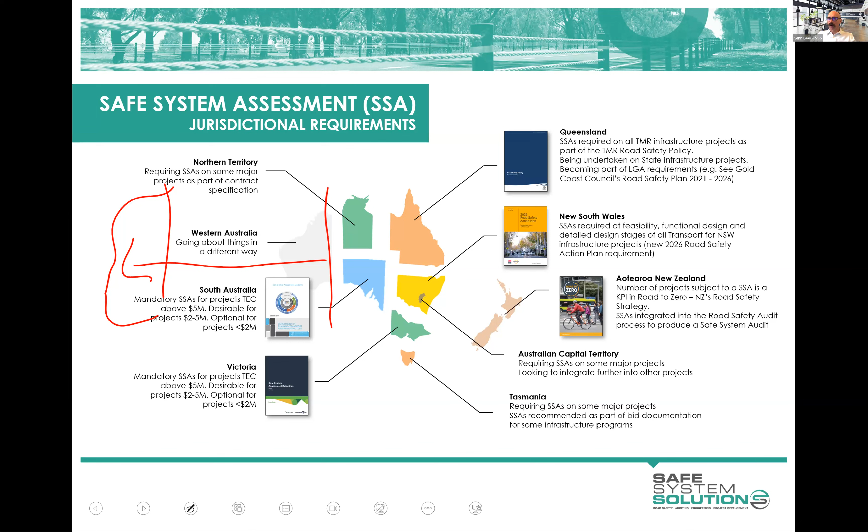And the way it was done was using a crash prediction model. A crash prediction model, as the name says, looks at a road or a new investment using a very data-driven approach, trying to model and project how many deaths and serious injuries you would expect. So plugging into it things like projected traffic volume increases, pedestrian increases, cyclist increases, and also generally around 70 infrastructure variables to spit out some data around expectation on crashes.

Some models take into account past crashes, some don't - they just use data from around the world: we know this configuration would generally produce this number of deaths and serious injuries.

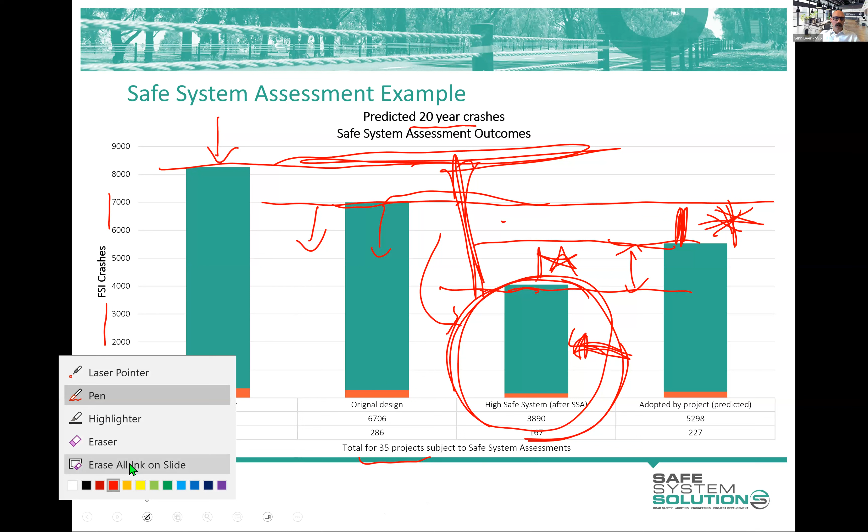So Joseph's popped a question in there about new vehicle technology, and whether that was also assisting in reducing crashes.

Yeah, so the prediction model does take into account vehicle technology and the improvements in vehicle technology over the next 20 years. The way they do that is pretty fascinating methodology for crash prediction. For all of the crashes they're expecting, I might as well spend a couple of minutes explaining how they do that.

So what you do is look at an existing road, and it's got a number of crashes on it at the moment. In the past 5 years, there's been a number of crashes. And what they do is take these crashes, and they actually do this for the whole state or region, not just the length of road.

But they take the crash and ask, what was the age of the vehicle in that crash? And they say, well, the vehicle was a 2013 Toyota Camry. Okay, so then in 20 years' time, it'll be a 2033 Toyota Camry. And what do we expect that vehicle will have in terms of features? So they're able to do that.

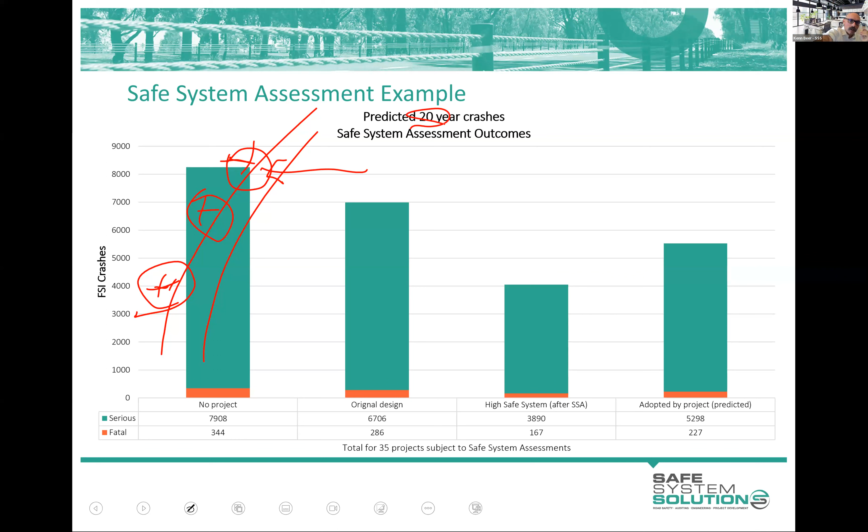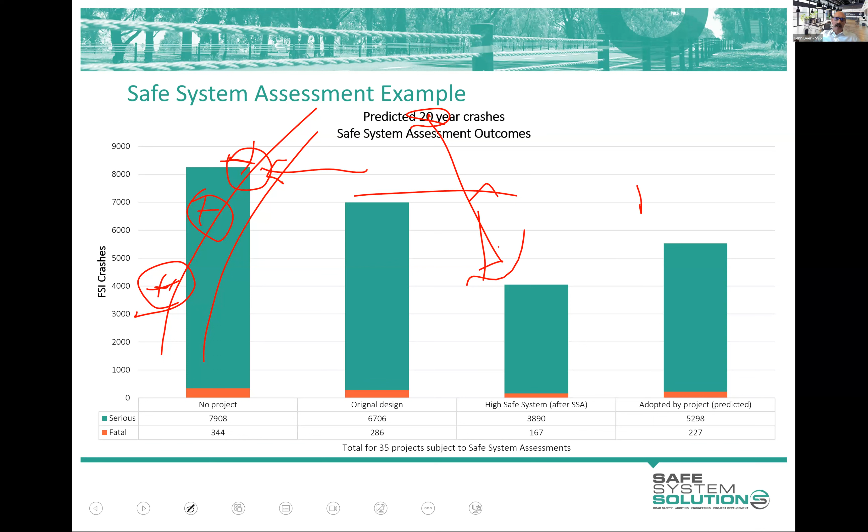Now, it gets a bit more complicated because your crashes over 20 years occur across those 20 years, not all at once, so you have to split it up that way. But it's about acknowledging that the cars involved in crashes today are not all brand new cars. In fact, a lot of them are old cars, and we expect that to continue into the future. That's how they factor it in. So a lot of crashes in this scenario, they say, will solve themselves with the vehicles. But I won't get into that in more detail, just to say there was some factoring of that into this.

We do have a question. Ken, I'm not sure if you're ready for this. Am I right to read it? Yeah, I see it's a big one. Big one from Michael, maybe specific to the assignment.

Okay, thanks, Michael. So the quick answer is yes, that could be possible. It could be possible within your assessment that the existing conditions has a score of 150, and the design has a score of 152. It's pretty much exactly the same. You're not really doing anything. You're changing things, and there may be other transport objectives being addressed by it, but from a safe system alignment perspective, you've pretty much done nothing.

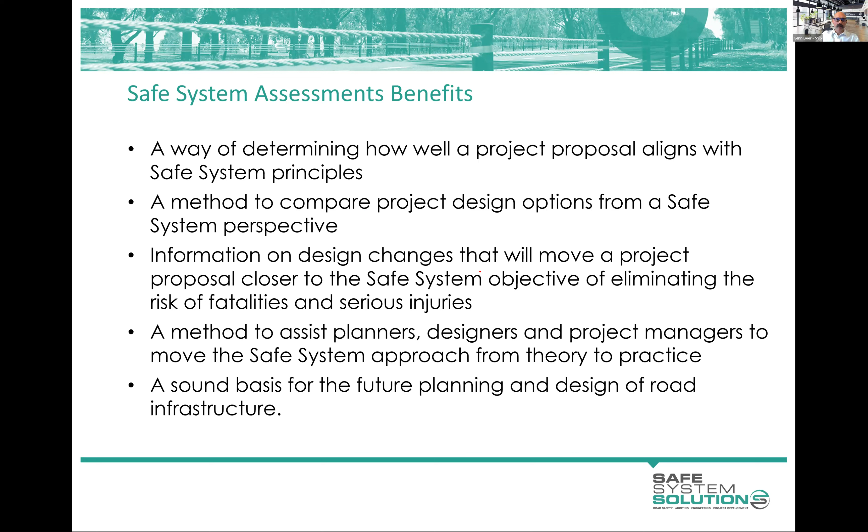Safe system assessments are best done at the early stages of a project, because there's willingness to change, to adopt ideas. There's often multiple options on the table, and that's a great time to do it.

Once you're into detailed design, or looking at a detailed design, people are very reluctant to make any meaningful changes to that project. They're happy to tweak around the edges - a warning sign here, a slight flare of a barrier there - but fundamental changes like raising an intersection, changing the form of intersection, or altering the cross section, those just aren't going to happen once you're in detailed design. That's why we want to get in early with the safe system assessment.

Road safety audits in early stages can make some of these suggestions on more fundamental changes, but they tend to align better and work better in detailed design, where they're really looking into the nitty-gritty details.

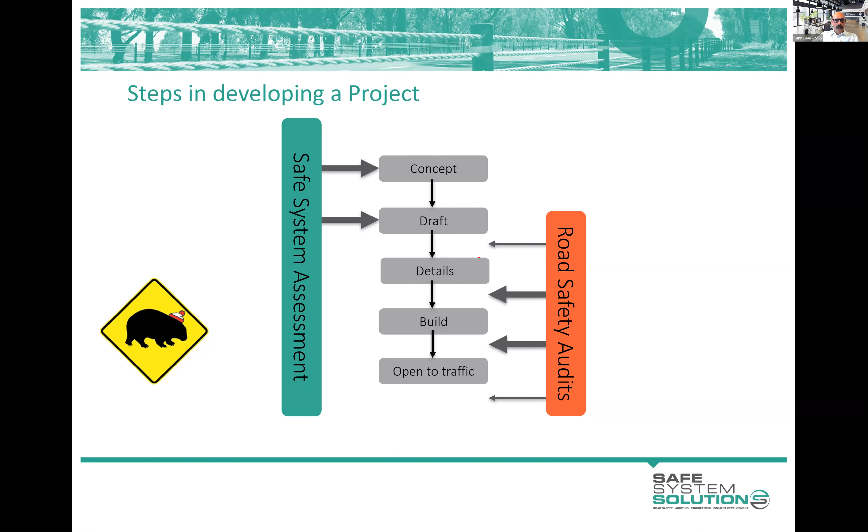So likelihood of crashes is addressed really well in both audits and safe system assessments. Severity, I think, is better done in safe system assessments - you're so much more overtly forced to really analyze the severity of crashes. In theory an audit should do it too, because you risk-assess with likelihood and severity, but I still continue to see a lot of road safety audits out there that don't.

The classic example is a big signalized intersection. The audit comes through talking about sight lines to the signals, phasing, lighting, line marking, pedestrian desire lines - really great stuff, right? But it completely ignores the severity when somebody runs the red light. The audit is 100% focused on stopping people running red lights, and that's great, we want all of that. But we need to put ourselves in that position to say: even if we get all that right, if you're running a set of signals at 80 kilometers an hour, people are going to crash. Doesn't matter if you've got mast arms and LEDs and great sight lines and advanced warning - they're still going to run it.

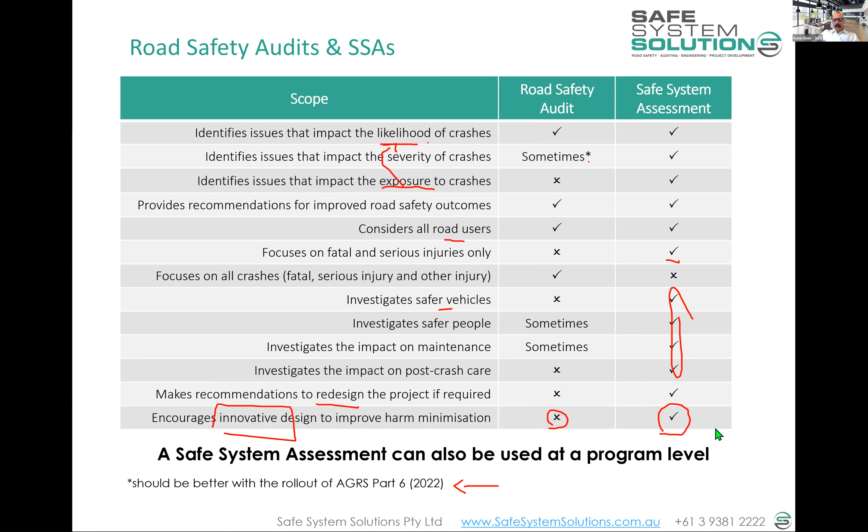Okay, so the process of safe system assessing in general practice is very similar to the process for a road safety audit. I haven't talked to you about full and rapid safe system assessments yet - that's the next few slides - but they are fairly close to each other anyway. One's just a bit quicker to do, rapid being part of the name. Not a huge amount different. There are just a few little corners that are cut on a rapid.

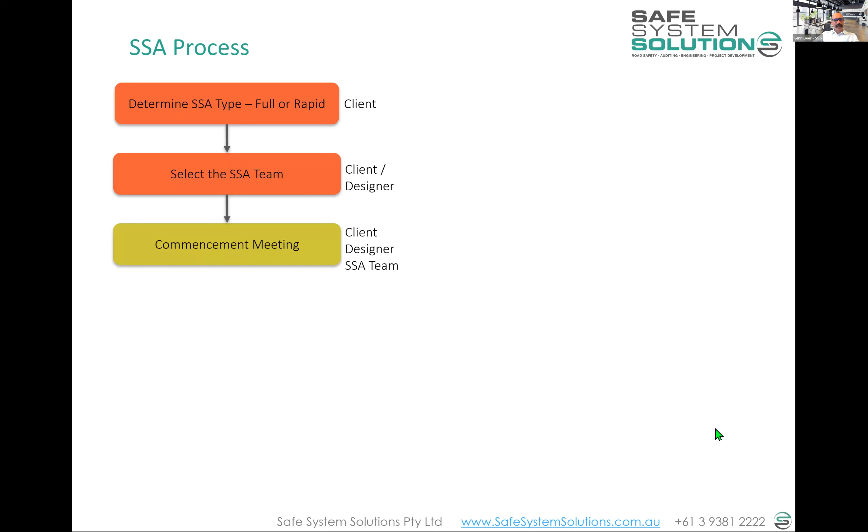So somebody's deciding A, to do a safe system assessment, and B, whether it's a full or a rapid. And then there's the selection of a safe system assessment team and some sort of commencement meeting, and within that, exchanging of information, understanding the scope of the project, getting everybody clear and on the same page - what's happening, what's being proposed, what's the land use, what's the area, what are you committing to here?

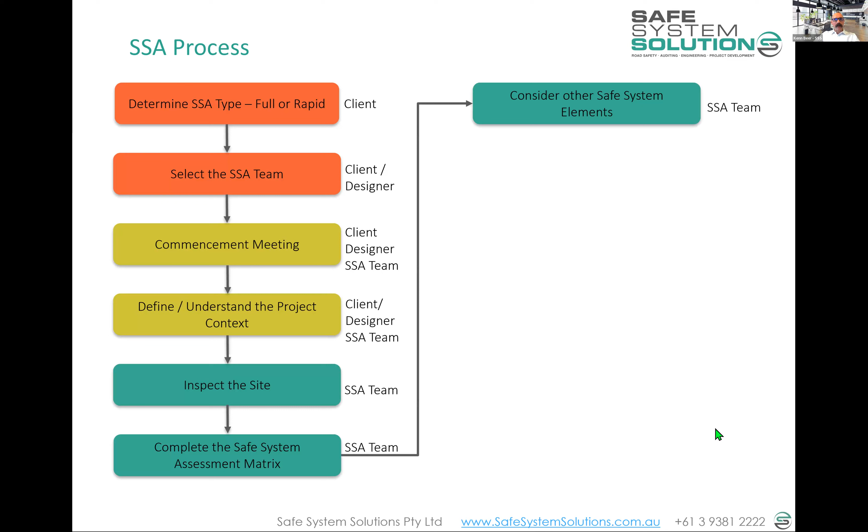Then the assessment team gets out and looks at the site, fills out the existing conditions matrix, and then all of the matrices that come from there, depending on how many design options they're given. Considers those wider elements of the safe system - those qualitative questions I talked to you about yesterday, at the end of last session, about general considerations, some ideas on treatments or changes or redesign alterations that would improve alignment with safe system principles.

It's all reported up in a fairly standard manner, and you've been working with a standard reporting format, which is going to help you - you just follow that and use that again. And then it's handed over to the designer or the project manager, and they look through and decide what they can and can't do and what changes they're going to make.

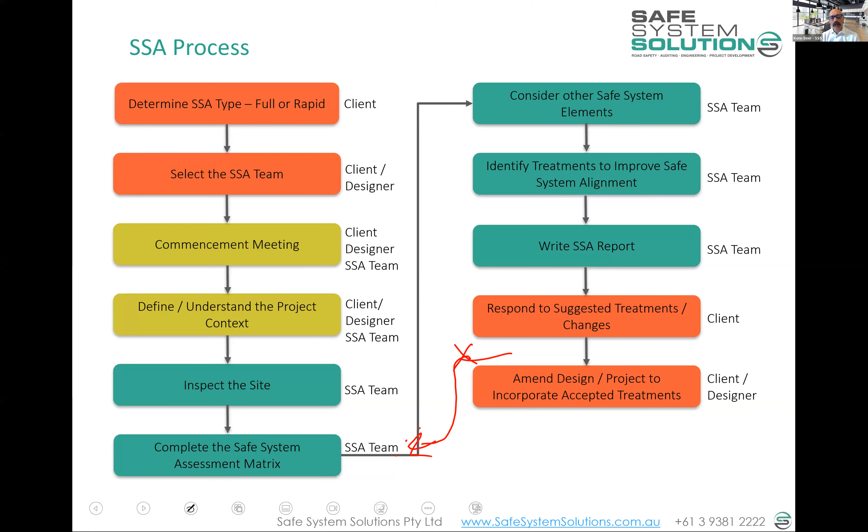And then the design is amended, and those are incorporated into the project. Now, what will often happen, or sometimes happens, is between these stages they'll ask you to rescore. So they've said, well, okay, thanks for all your ideas, we're going to do these 6 out of 10 that you've come up with. Can you tell us what that will influence in terms of those scores and the matrix? So then you would rescore that as though it's a new option, and you'd be able to provide that change.

I kind of like that for a number of reasons. But one particular one is that you can end with this really nice graph, which says the total original do-nothing scenario, existing conditions, had a score there. And then the design we put forward to get safe system assessed was there. And then we took on these recommendations and it brought it down to there. And that is great proof to anybody that you've been pushing hard to get the best you possibly can in alignment with safe system principles. It's a good little story.

So, Loretta, I saw that - sorry, just a little comment there from Joseph, just to confirm the safe system assessor should be independent for the project, like in RSAs.

Yeah, so there's never been as strong a demand for independence for safe system assessing as there has been for road safety audits, where everybody on the team must be independent, like for a road safety audit. That's just, you have to do that, right?

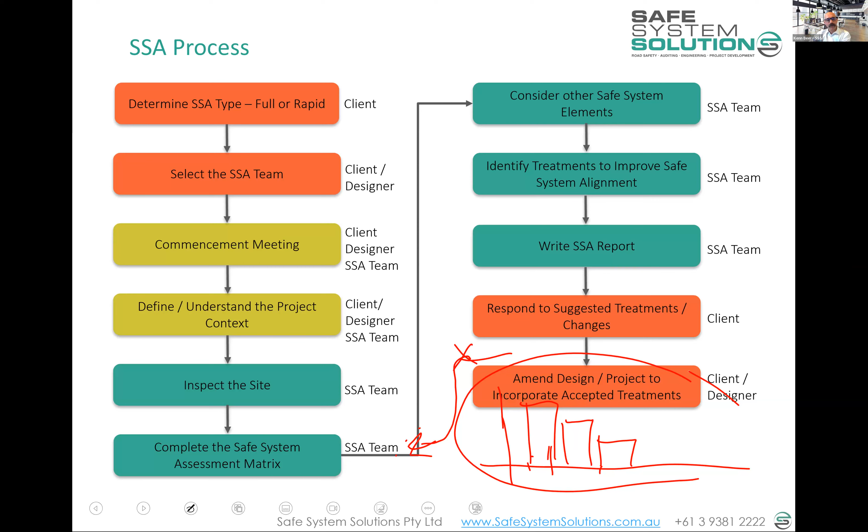So who is putting up registers? Which jurisdictions are doing registers? So many of you will know there's registers of road safety auditors around the country, and you call yourself an accredited road safety auditor in Victoria or in Queensland and the like. So Victoria has a list of recommended safe system assessors, which you'll be eligible to get onto.

It's on the Safe System Engineering page of the VicRoads website - so it's DTP now, but they still use a VicRoads website, I'm sure they'll move that over at some point. But here you see the Register of Recommended Safe System Assessors. This is how you get onto that list - it says you've got to do this course, and pass it. So that's good.

But then you have to actually submit a proper safe system assessment. So you can do a safe system assessment as the one you're going to use to submit, and then it's got to be submitted in, and it's marked. And if they think you've proven your safe system knowledge and the ability to do a safe system assessment, then they'll put you onto the list, which is just a PDF list that they periodically update, with name, organization, email, and phone number and the like. So you can do that if you like.

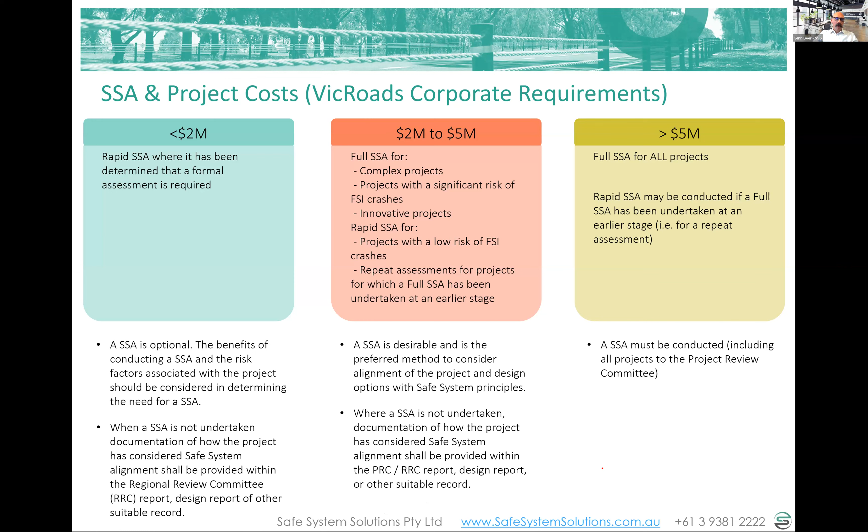The only reason you can do a rapid safe system assessment is if a full assessment has already been done and you're doing one of those repeat assessments. So the difference between a full and a rapid assessment isn't that much. A rapid is maybe about 75% of the work of a full one.

You're going to have some chat with the client at commencement. You need to get intel on both and understand the project. They talk about a workshop, sitting around actually talking through the plan, putting it out as a road plot, getting intel, ideas and thoughts, and understanding risks with the project team. That's even optional in full safe system assessments, but it doesn't really occur in rapid.

For site inspection, in theory you can do rapids without going to site - you look at the plan, street view to get a general idea, maybe some photos. But most of the time for rapids, people still go to site anyway, just to get a good feel for it. You do the matrix in both, but you don't do those qualitative questions in a rapid - they've gone. So you're just doing the matrix and recommending changes.

The reporting is a little bit less in a rapid safe system assessment than a full one, and then everything else is really the same. You've got to make recommendations, and they decide what they're going to do and make changes as needed.

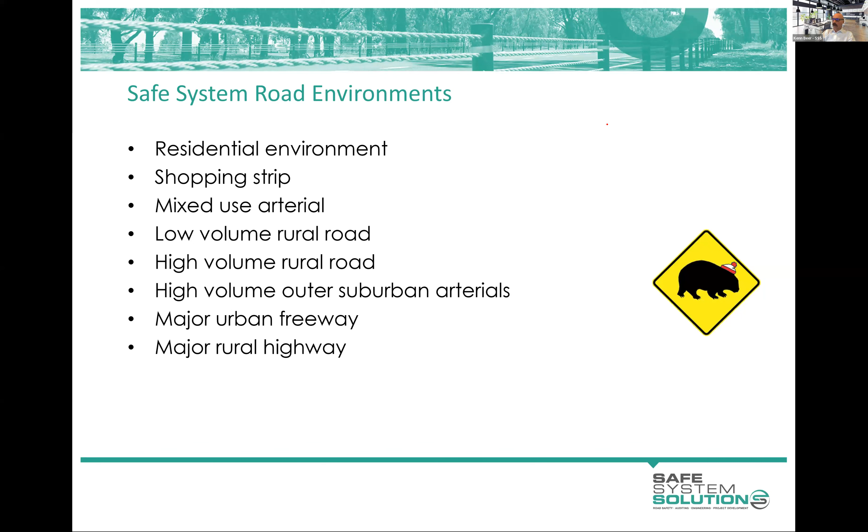So your recommendations might be quite well aligned. Now we practiced this a bit with our movement and place categorization and thinking of ideas on that. So we were pretty well moved along, and so we can do this fairly quickly and give you some time back to finish off your safe system assessments and your quizzes and the like. But maybe I'll get some ideas out of you on these residential streets. So it's 50 kilometers an hour, default speed limit, access is out onto an arterial road.

Maybe jot in the chat some things you could do to improve alignment with safe system principles here. And of course, just for fun, let's categorize those into exposure, likelihood, and severity. Pop in any thoughts while I read this question that's just popped in.

So where do we account for post-crash care? Generally it's all covered in the additional commentary questions. It might factor a little bit into your severity, but you're generally thinking about severity of the bulk of the initial incident and the initial energy transfer. Generally, if you follow those questions, there's 5 questions on post-crash care, which is your way to inject that in, and then the recommendations might come out around that.

Lower speed environment, 30 kilometre per hour, addressing the likelihood and severity. Beautifully done, Jess. And local area traffic management is going to be very good for that. And that will, in the same way, lower speeds, which lowers likelihood and severity of crashes. Other things to think about are restricting access. And we know that there is a lot of rat running done in these sorts of environments, and there's no need for it. That gives it the feel of a movement corridor, which it certainly is not. So restricting access, lessening exposure in that sense could be a good one.

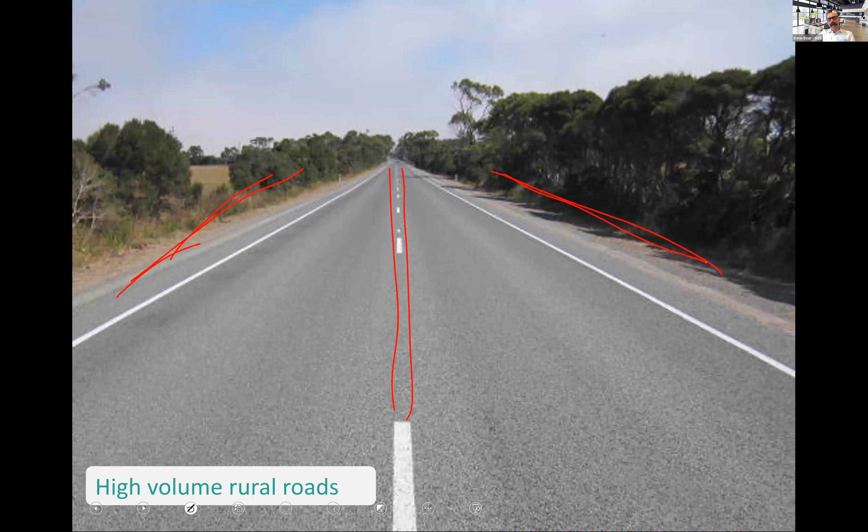But our high volume rural roads, this one doesn't look high volume, but it is. That's where we're talking about central barrier systems, outer barrier systems, and maintaining the higher speed. It's got important strategic function, and that addresses the severity of the crashes.

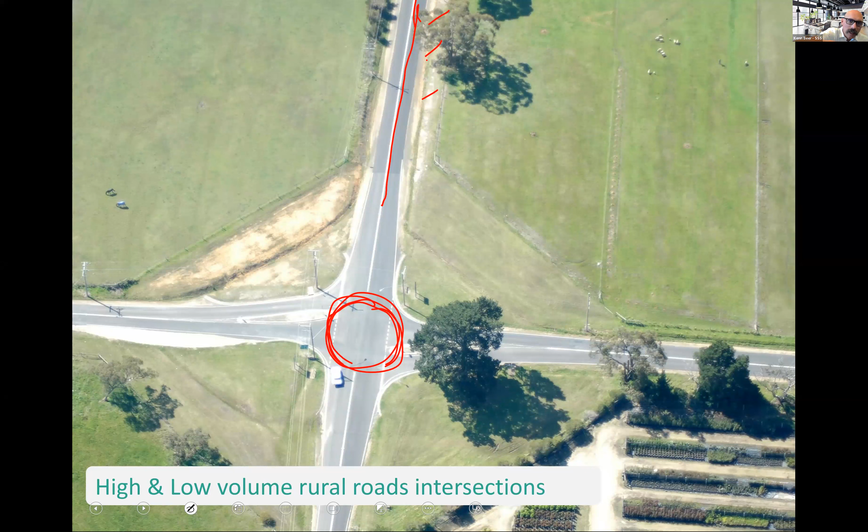And when you do that, and you have your central barrier system, an opportunity arises with an intersection like this, where if you can put your roundabout in, maybe a compact roundabout, you can have access points that feed off, going up much further in there. The roundabout creates that U-turn opportunity, because they can't come out and turn right since the barrier's down the middle of the road, but you can accelerate them down here, they turn around and go back that way.

Your distances that you're able to do that, maybe a couple of kilometers, is starting to stretch the friendship. But trying to minimize gaps in the barriers is a good thing to do. Plus, of course, you get some really wonderful safe system aligned intersection treatments going on there.

So a nice activity to do if you're dealing with lengths of network is long-term strategic safe system planning of the route from an infrastructure perspective. Lay out the route with all these different intersections, and think about it from that whole perspective: okay, maybe in the future we'll have a roundabout at this one, a roundabout at this one, and a roundabout at this one, and then we'll make this one left in, left out.

Then you can start to say, well, that's sort of a future scenario, and then step it back with a scope ladder and say, what's the best thing to do to start with? It may be that the best thing for us to do to start with is a roundabout here and a central barrier system there, and that's project one. But it aligns well with your thinking of future scenarios.

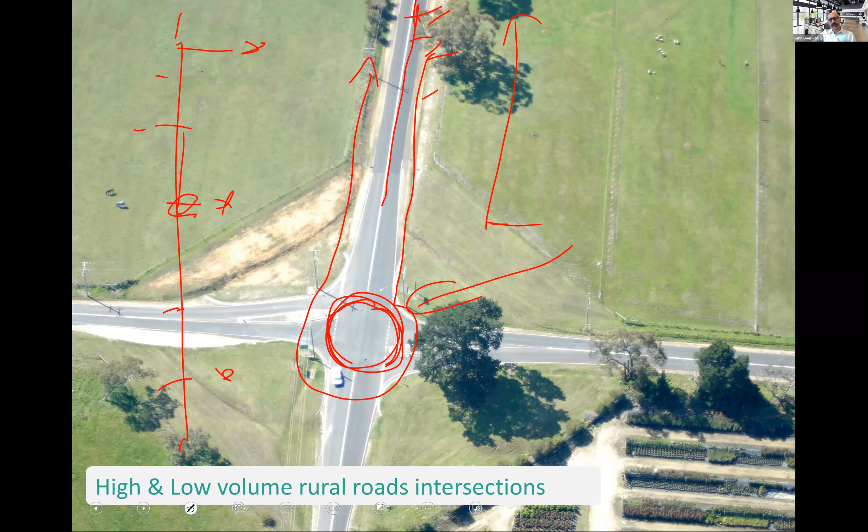Couple more. High volume outer suburban arterial roads, these major traffic routes, they're not nice places to be, but they provide a function in the bulk of cities around Australia and New Zealand. But the answer, if you want speeds of vehicles above 40 or 50 kilometres per hour, is you can't mix or even have vulnerable road users on that same pavement. So these 70, 80 kilometre arterials with bike lanes are not well aligned with safe system principles.

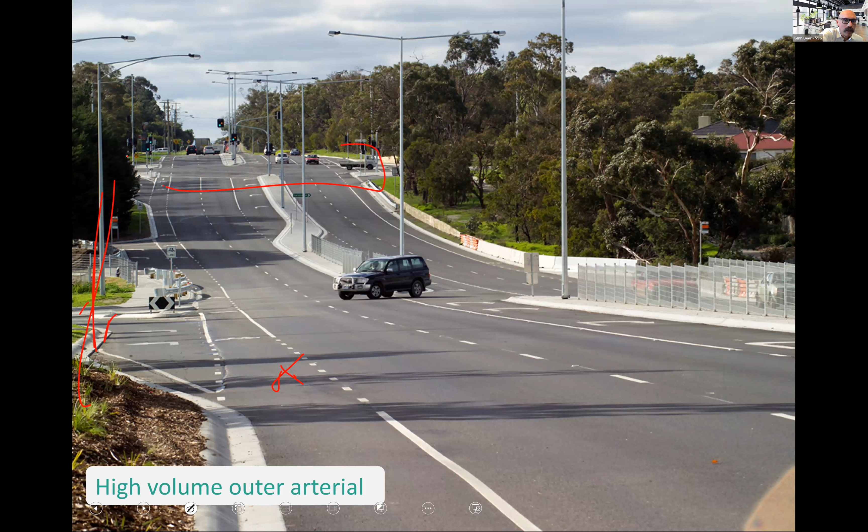Completely separated off-road paths to eliminate that exposure, raising any crossing points there. You still want to think about raising the signals, but this is where we'd be starting to push for pedestrian overpasses, underpasses. Pedestrian fencing becomes more of a viable option in these sorts of scenarios.

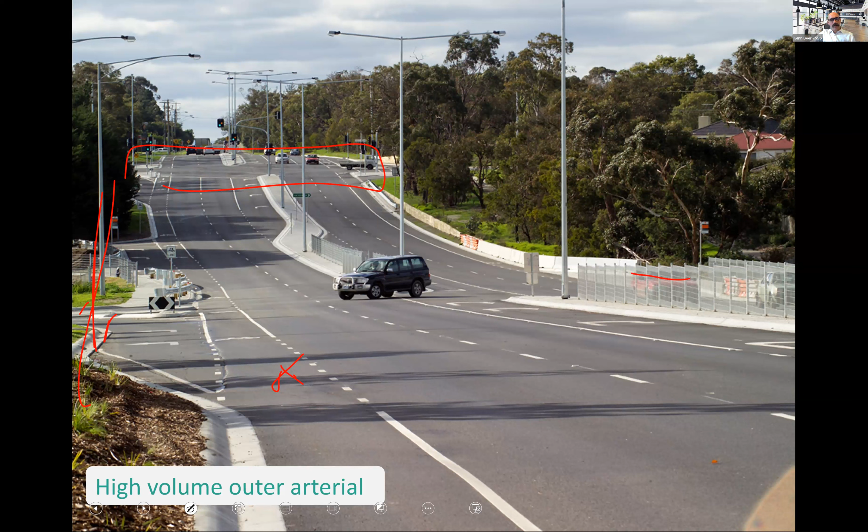It's a traffic route, and you want to make it more and more like a motorway, really, if that's where you've decided to go. Motorways in their own right align well with safe system principles for the fact that we've eliminated a lot of the crash types: head-on crashes, run-off road crashes, there's continuous barrier systems, intersection crashes have been eliminated. Yes, you have on-ramps and things like that, which is a lower severity possibility.

So the use of managed motorways is a good one. Lane use management systems, freeway ramp metering, and you can close down lanes using this, proactively reduce the speed as congestion builds, or you're about to get into flow breakdown based on traffic theory with headways and the like. It becomes a really good environment.

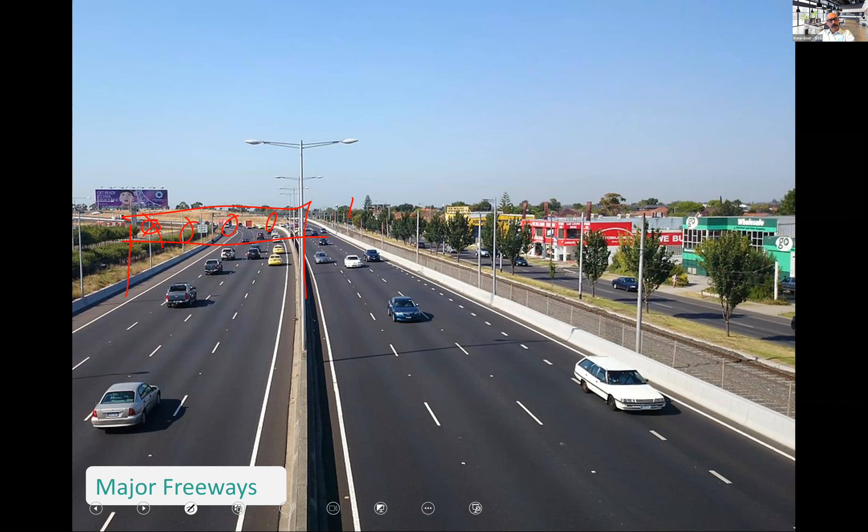Monitoring for vulnerable road users using a lot of the video detection systems is a good one. So when you do have the taxi pull over for the person to get out and whatever they're doing, throwing up or whatever it is, which happens on motorways, and then we see fatalities associated with that, being able to detect that and reduce speed and close off lanes proactively is a really great feature.

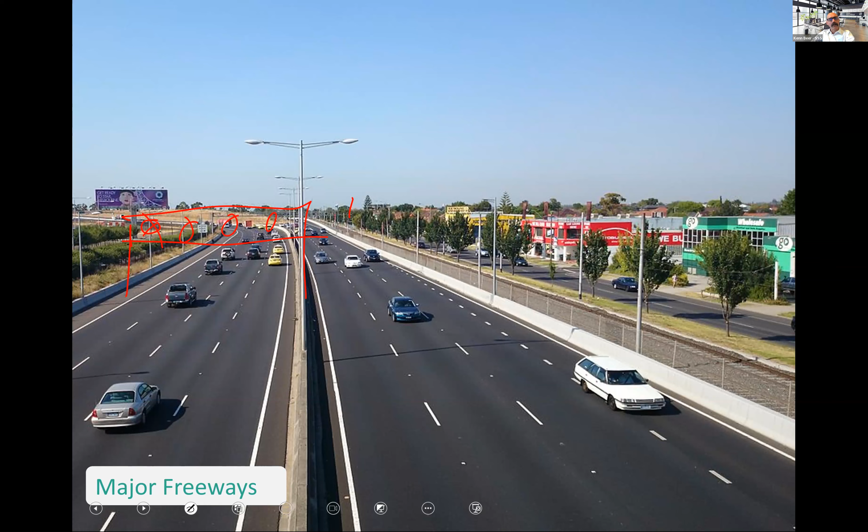Major rural highways, from the start, as they get duplicated, will have continuous barrier systems from now on. Anybody who does a safe system assessment on that is guaranteed to suggest continuous full barrier systems on these large duplication jobs, and retrofitting existing barrier in continuous barrier, because we know people are going to fall asleep and leave their lane, and we need to provide that protection.

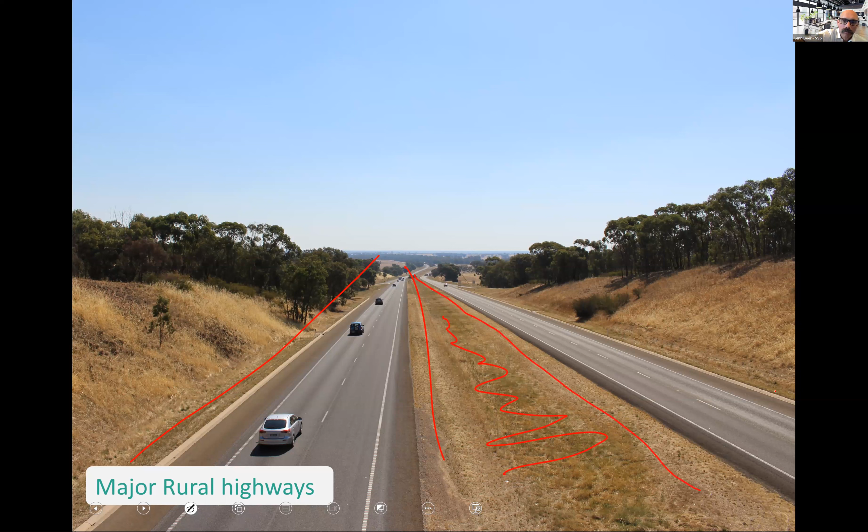And then for the intersections, grade separated of course. But if you do have at-grade intersections, they can operate in a fairly well-aligned safe system manner. Say you have an intersection with a big median there open at 110 kilometers an hour, it just doesn't score well in a safe system assessment.

But if you block that off and have a good acceleration lane and a good length of space for them to merge over, and then a U-turn and an acceleration lane back in the median - merge from the right's not the best, but if you've got speeds and volumes right, then they can turn. So what you've done is created delta V's, change in velocities, within tolerable limits at these locations. So it's possible to do it from that perspective.

Grade separation is better, or potentially site activated speed and warning systems and the like, to reduce the likelihood of crashes.

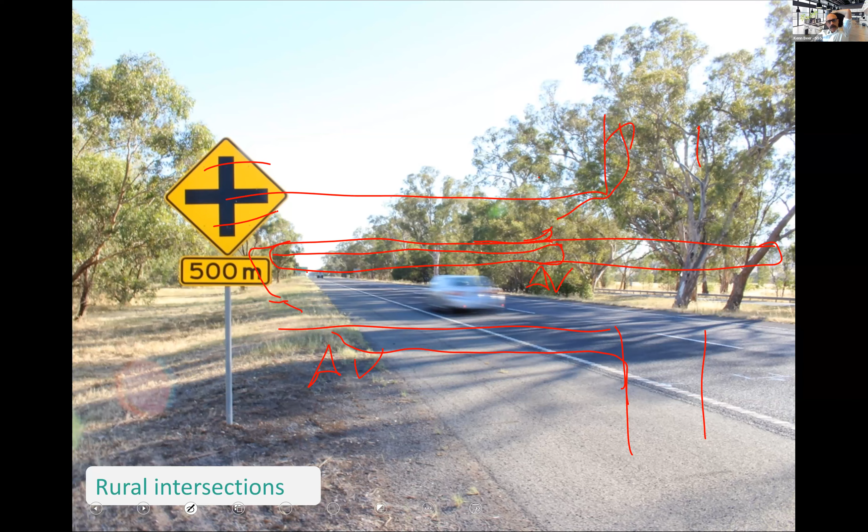Okay, I raced through a little bit there. I think we've done quite a bit of that sort of discussion and thinking as a group already anyway, so I don't really need to labour the point. I want to give you some time back to finish off the course, and I'll take any final questions or comments. I had a little bit of extra content which I don't think I'll do - I think this group's got their head around most of the things I'm saying based on the quizzes and quiz results and the module 2 assignments and things like that.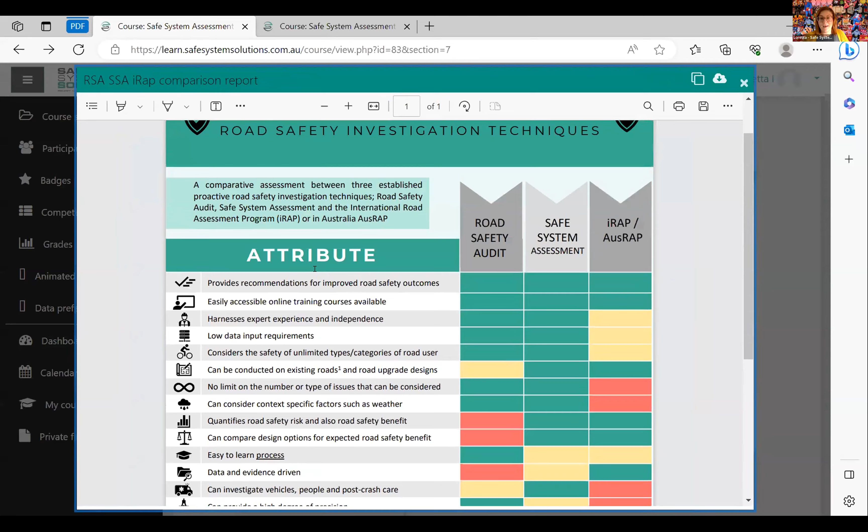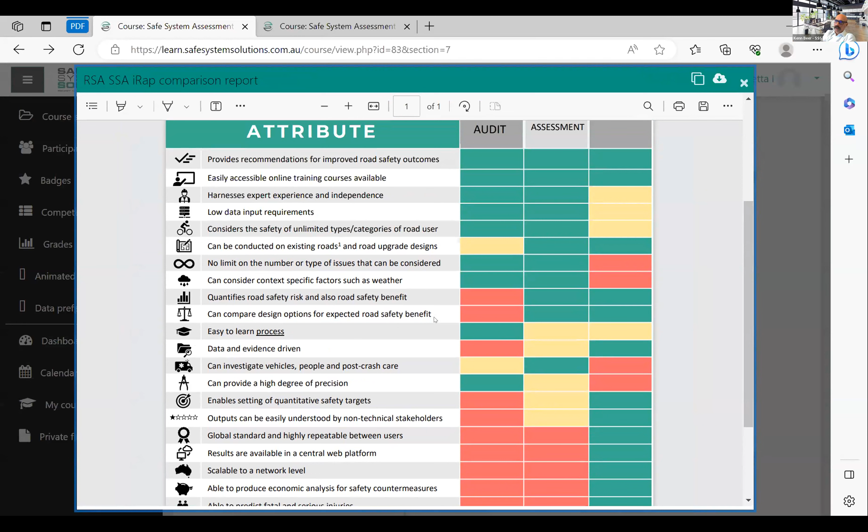I'm glad you brought that up, Laura. Thank you for doing that, because that's just a common question that I'd get asked, and others would be asked - well, what's the difference between this AusRAP thing and a safe system assessment, or a road safety audit and an AusRAP or iRAP. So I just tried to lay out some of the key differences. You can see there's a lot of similarities, but yeah, good.